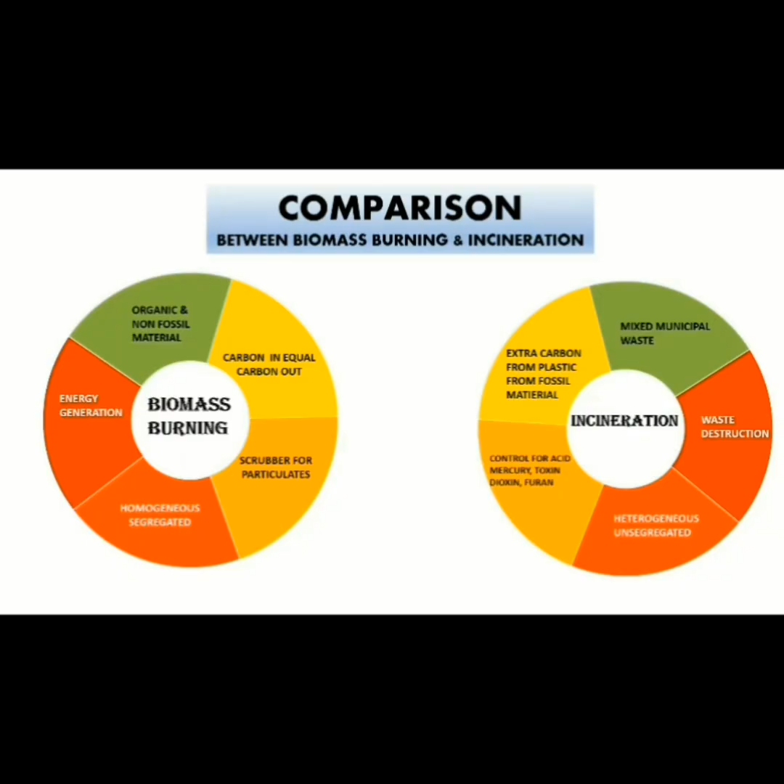To understand why the Horno is different, we must first understand the critical differences between the biomass burner and an incinerator. While both use combustion to create heat, their fuel source and philosophy are worlds apart. Confusing the two is a costly blunder that could prevent us from adopting an effective solution. Number one, on fuel source.

Biomass burning uses renewable and organic, segregated, plant-based material such as wood chips, sawdust, agricultural waste, and dried leaves. This is a clean fuel. Incineration is burning unsorted municipal solid waste in a mix of plastic, food, rubber, and textile.

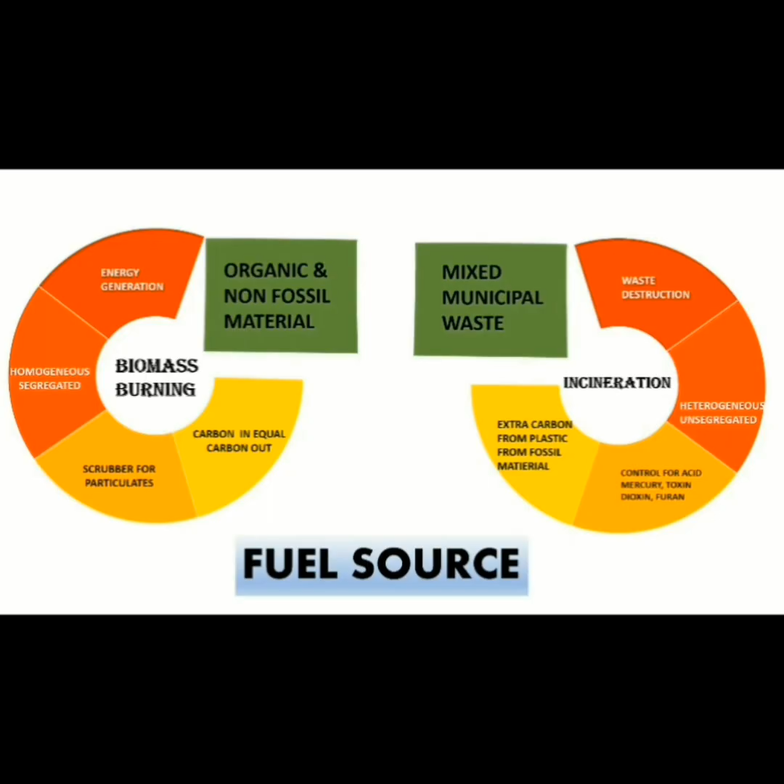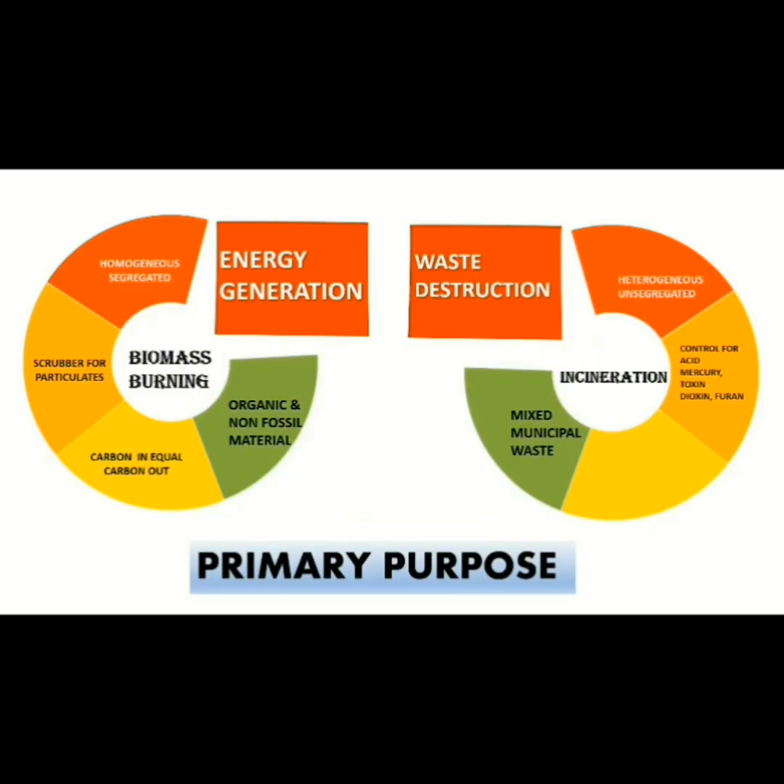Number two is primary purpose. The main goal is to produce heat for useful purposes like cooking, drying, and generating power. Incineration is for waste destruction. The main goal is to reduce the volume of trash. Energy is a valuable byproduct.

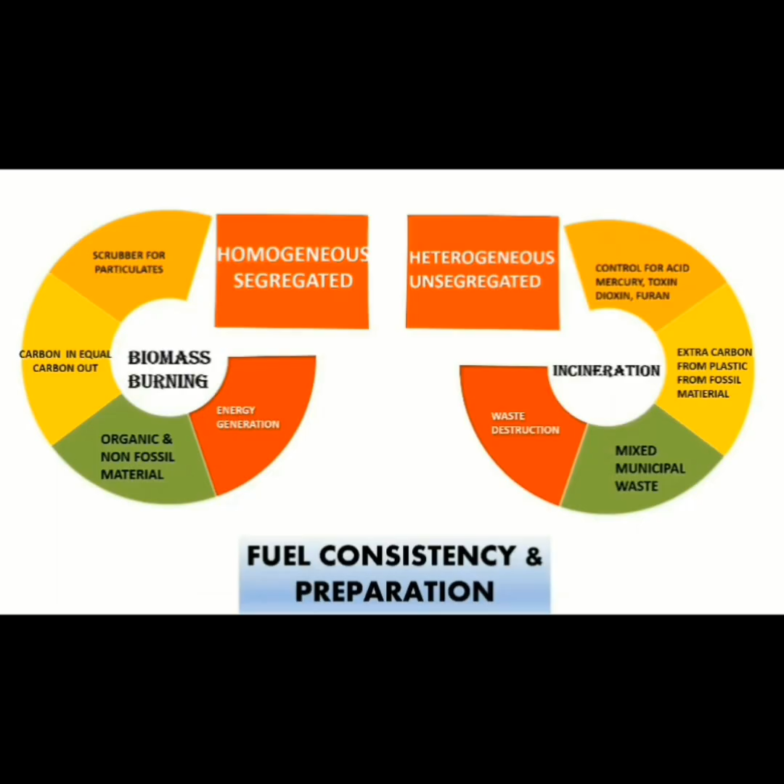Number three is fuel consistency. Homogeneous. The fuel is relatively uniform, allowing for a clean and efficient combustion. Incineration uses heterogeneous fuel that is inconsistent, making combustion control difficult and less efficient.

And fourth is the emission. We have a cleaner and predictable emission for the biomass burner, mostly carbon dioxide, water vapor, and particulates. Pollution control is simple, focusing on managing smoke.

For the incinerator, it is complex and hazardous. Burning plastics and synthetics can release dioxins, furans, and heavy metals. This requires highly complex and expensive pollution control.

And number five is carbon neutrality. Biomass is carbon neutral; it releases biogenic carbon absorbed during the plant's life, which is reabsorbed by new plants. Incineration is not carbon neutral; it releases fossil carbon from plastic, contributing to greenhouse gas accumulation.

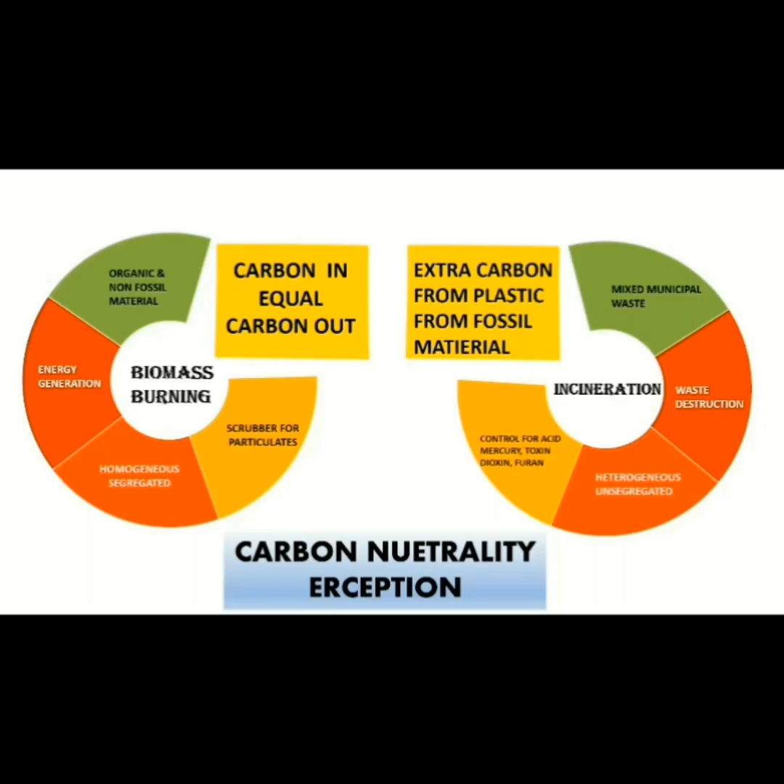Choosing to extract plant-based material from segregated garbage and burning them in a simple controlled furnace like Horno is biomass burning. It is a solution. This means we must stop viewing segregated organic garbage as waste. Instead, we must see it as a valuable resource, a source of high-quality biomass fuel.

By doing this, we can mimic the natural, efficient cycle I witnessed as a child. The Horno is a return to the traditional intelligent principle, using what we have to create what we need. The heat generated from this process isn't pollution. It is a resource that can be used productively to cook food, generate steam, dry wet materials, and produce power.

My demonstration proved this simple innovation works. It bridges the gap between a childhood memory and a modern necessity, offering a practical, community-based tool to reduce our waste and recover its value.

Imagine an unsegregated pile of garbage, particularly the kind carelessly thrown beside the road. It is a chaotic mix of all waste from a household, eventually finding its way to a dump site where it becomes a problem for the local government to handle.

Our local government unit has been actively promoting waste segregation. If we were to properly manage this pile, the first step would be to spread it out and sort it into 6 categories, that is, compostable, biodegradable, metal, e-waste, plastic, and residual waste. Of this, compostable material can be turned into compost if there is available land.

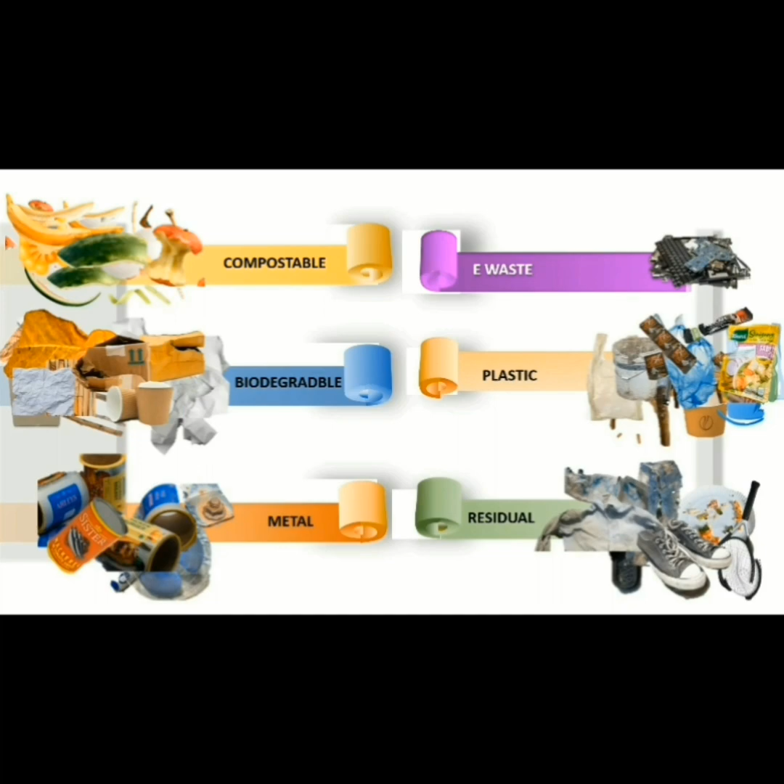For segregation to have real meaning, we need a viable diversion option. This is where the concept of Horno comes in. If mixed waste were brought to my burner, that would simply be incineration, which is not my intention. Instead, I want to support the segregation process by offering Horno as a legitimate diversion option. The Horno was conceptualized precisely for this purpose, to provide a use for certain waste streams.

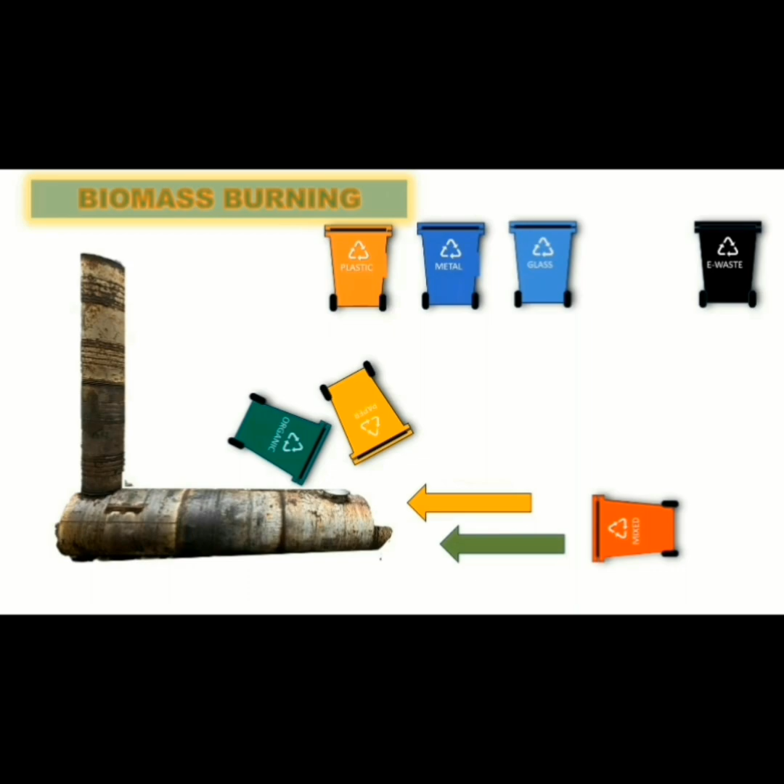For instance, one proposed application is to use it to heat cooking utensils directly, utilizing the thermal energy. Furthermore, the Horno is designed to facilitate pyrolysis. The heat it generates can be used to pyrolyze certain materials like plastic. To complete the pyrolysis process, the temperature needs to reach around 500 degrees. While this aspect is still in the experimental stage, it represents another potential diversion pathway for segregated plastic. It is without a doubt a work in progress.

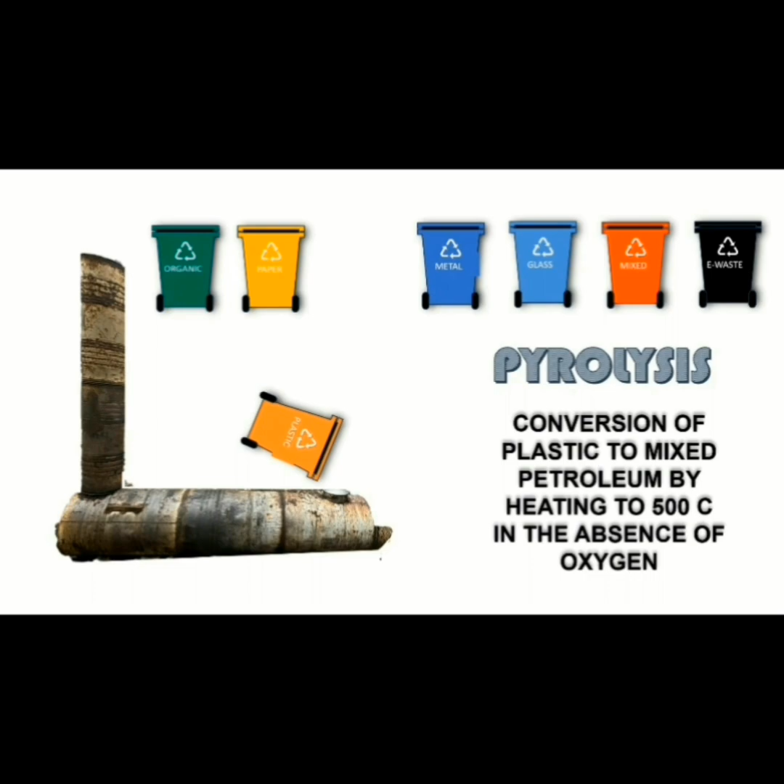There are 5 reasons why my Hurno is an ideal solution for this crisis situation. First, it is rapidly available. Units can be fabricated and mobilized within a week. The initial barrel-type model serves as a temporary solution to provide immediate relief. However, for a lasting impact, I propose developing a permanent design featuring brick liners and an ash withdrawal door to easily remove accumulated ash. While the barrel Hurno has an operational lifespan of about 2 months, the permanent design would provide a long-term solution. A scrubber will also be installed to control particulate matter.

Second, it fosters community acceptance. The Hurno design is intuitive because it resembles a traditional furnace. Its versatility is a major advantage as it can be adapted for multiple uses such as cooking food, distilling water, or even drying biodegradable waste before it is fed to the unit. Third, it is an economically viable solution. The Hurno is low cost, easy to fabricate from readily available materials, and can be mobilized immediately to where it is needed most.

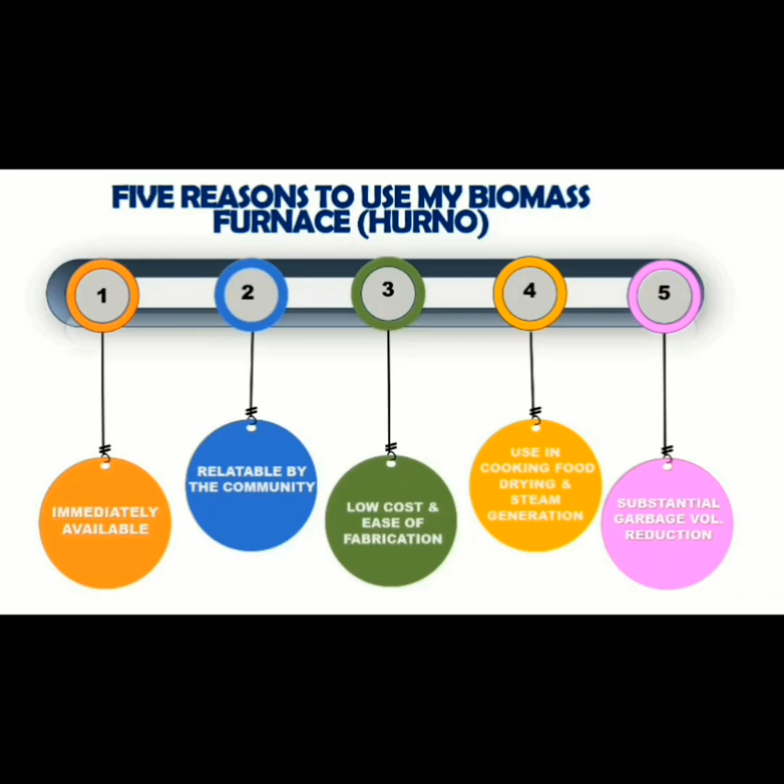Fourth, it maximizes energy utilization. The available heat energy generated by the Hurno is not wasted. It can be harnessed for practical applications like cooking, generating steam, and drying material. Fifth, it offers significant environmental benefits. As a diversion strategy, the Hurno can achieve a substantial reduction in the volume of waste that would otherwise end up in the landfill.

This is the Hurno, and today we are presenting it after 3 successful demonstrations. The first 2 tests were conducted in Mandaue City to verify that the device operates without producing visible smoke. The third one we did by invitation of Barangay Calamba in Cebu City. We also used it to cook banana, demonstrating the heat generated can sufficiently cook food. This serves as a proof of concept.

If the LGU accepts this as a viable waste diversion option, I can provide further improvements to make it operationally ready. As an inventor, I am satisfied that I have proven the concept works. However, the value will be realized only if it is given proper consideration for practical use. With this presentation, I rest my case. The decision now lies in your hands whether to give this project the green light or not.